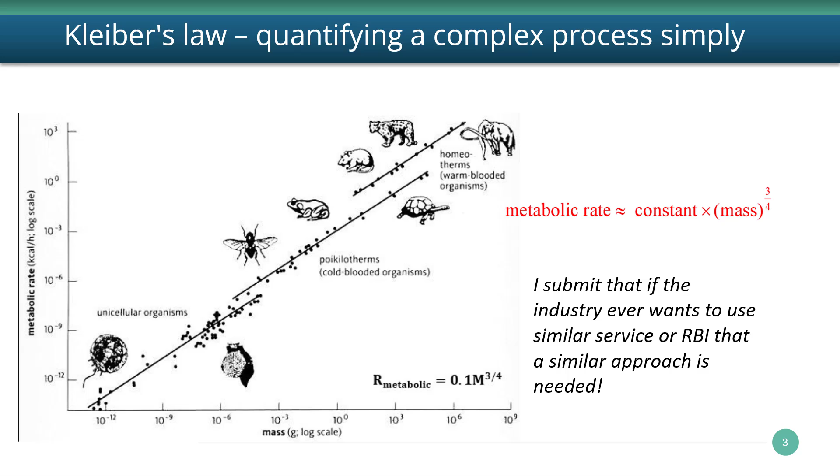Back on topic. Corrosion can be measured at any time for all tank components except for the tank bottom. That is why we are focusing on tank bottom corrosion during this talk. Getting access to the tank bottom requires that the tank be cleaned and gas-freed so that internal entry can be made to assess the state of corrosion as well as the internal condition of the tank. Typical corrosion mitigations are coatings and sloped bottoms.

The window of opportunity for bottom corrosion measurements piggybacks off of the tank internal inspections, which only occur every 10 to 20 years. Unfortunately, no serious public domain work has been done on corrosion rate prediction for tank bottoms. I doubt that any company has done sufficient work in data collection and analysis either. In the data sets I have reviewed for several major integrated oil companies, they all had serious flaws making predictive analytics for corrosion impossible or inaccurate at best.

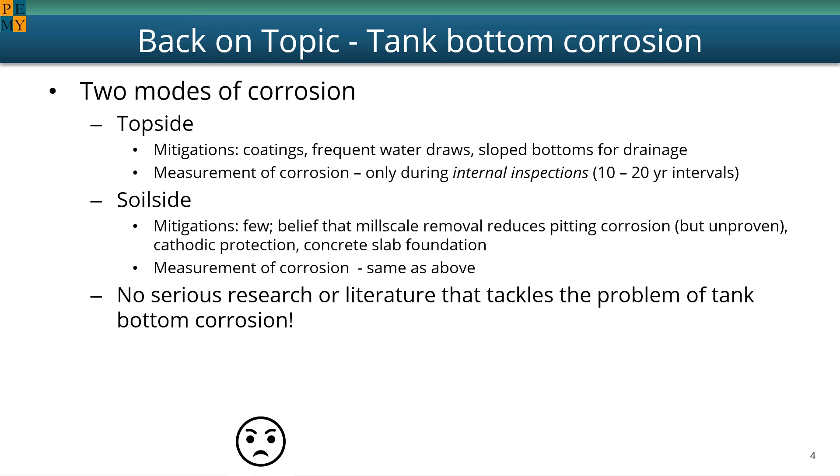Earlier I said that tank bottom corrosion was complex. You will often see or hear a claim that corrosion can be predicted with a table like the one at the top left. Unfortunately, what is not mentioned is that the variables, and there are many of them for tank corrosion, such as those to the right, have interactions.

To explain this, consider the enjoyment of eating a hot dog. Does a condiment increase enjoyment? In the example of the hot dog versus ice cream, the obvious answer is it depends. Enjoyment goes up if chocolate syrup is added to ice cream, but it goes down if added to a hot dog. Whereas enjoyment goes up if mustard is added to a hot dog, but goes down if it is added to ice cream. The effect of these variables for condiments is called variable or factor interaction, and this is the simplest possible case.

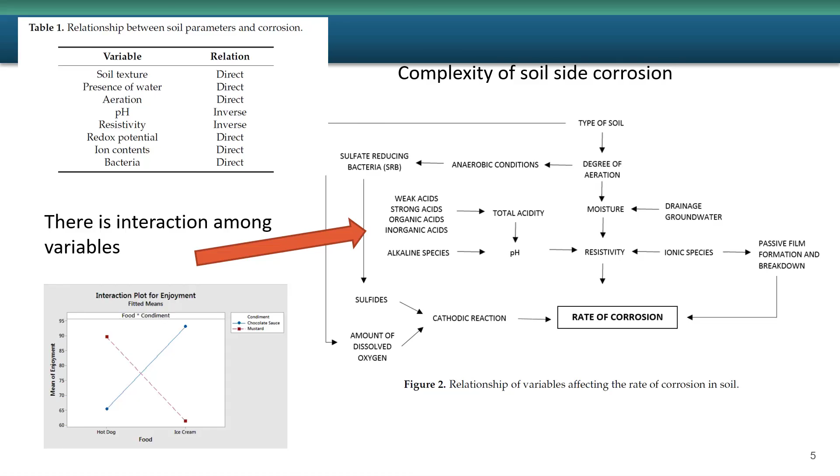Imagine all of the interactions taking place for the variables in the flowchart, where there can be 3-way and even 4-way interactions. No wonder it's nearly impossible to predict tank bottom corrosion. I definitely am not saying throw up your hands and give up. Much more can be done.

What we do know about tank bottom corrosion comes from NIST, where there was and is interest in buried pipelines, power generation, and infrastructure where steel is in contact with the environment. Early on, it was recognized that steel corrosion follows a power law, as shown. The corrosion rate slows down with time because the ionic flow path becomes even more difficult as a result of corrosion products that impede the ion flow. At this point, I remind you of Kleiber's law, and that it too was a power law. Of course, the parameters are different, but a simple power law works for corrosion too.

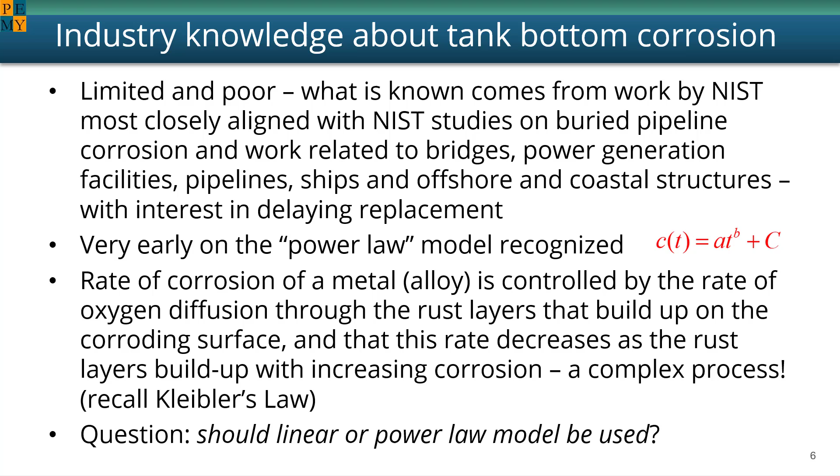However, today, and rightly so, the linear corrosion rate model is used. Even though it is slightly less accurate than the power law, it's much simpler to work with. So let's dive into corrosion modeling now. What does tank bottom corrosion data look like?

Here is data from a major integrated oil company, where the internal or product-side corrosion rate for 33 finished fuel tanks in 5 refineries was investigated. In total, there were 30 gasoline, 8 jet, and 4 other tanks. You can see from the table that 2 were in one refinery, 5 in another, 12 in a third, 10 in a fourth, and 4 in a fifth.

At the lower right, you see a box plot for this data. A box plot shows the interquartile ranges. The heavy line is the median. The lower 25th percentile for this plot is nearly 0, and the 75th percentile is just below 10 mpy.

There was one tank that had a corrosion rate of around 25 mpy. Unfortunately, in this study, they failed to state whether the tanks were coated and how long the tank was in service when the corrosion rate measurements were made.

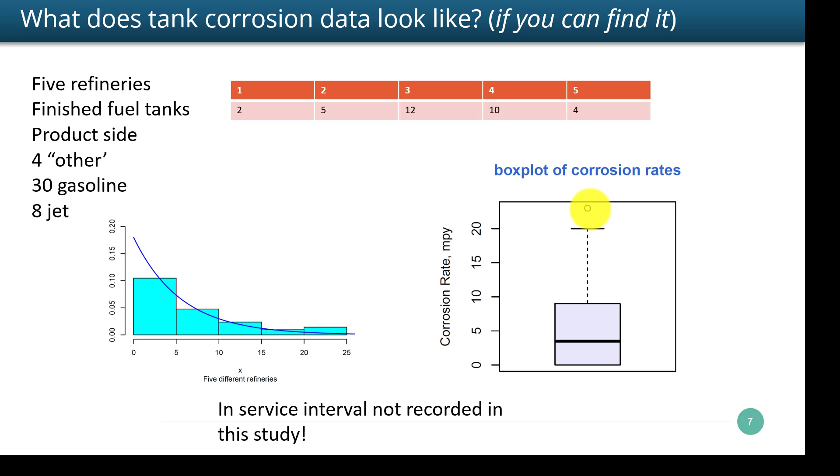Now let's look at soil side corrosion rates for these same tanks. The two plots are just different representations of the same data. Every data point is shown in the left plot, which is called a dot plot. The box plot on the right shows the 25th percentile is now about 5 or 6 mils per year, and the 75th percentile is around 12 mpy. There are also more outliers, and these have higher corrosion rates than the product side.

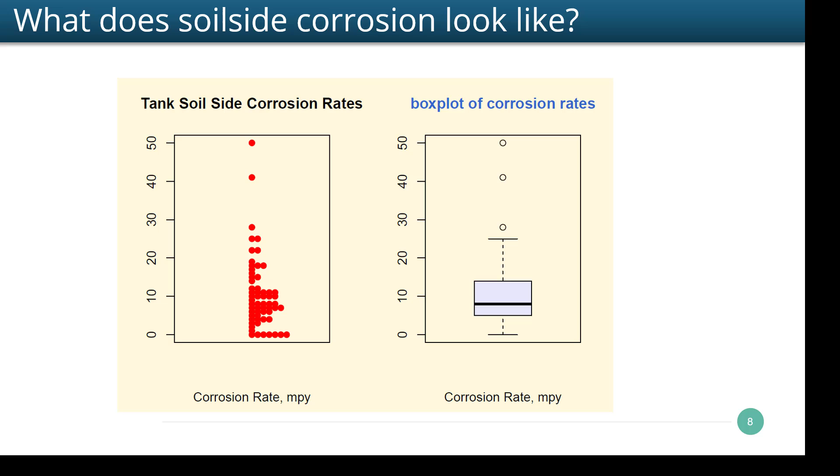For finished fuel tanks in refineries, it is clear that soil side corrosion is more aggressive than product side corrosion. One important aspect of the data was that it came from 5 different sites, and you would expect they differ in terms of corrosion rate.

Although data should never be tossed without a good reason, in this case one of the refineries was on such a muddy soil in a marine environment and with mostly heated tanks that it was thought not to represent typical corrosion rate processes for finished fuel tanks in refineries, and so was thrown out.

The histogram at the right shows that most soil side corrosion is less than 10 mpy, but the long tail also shows that it's possible to have very high corrosion rates occasionally.

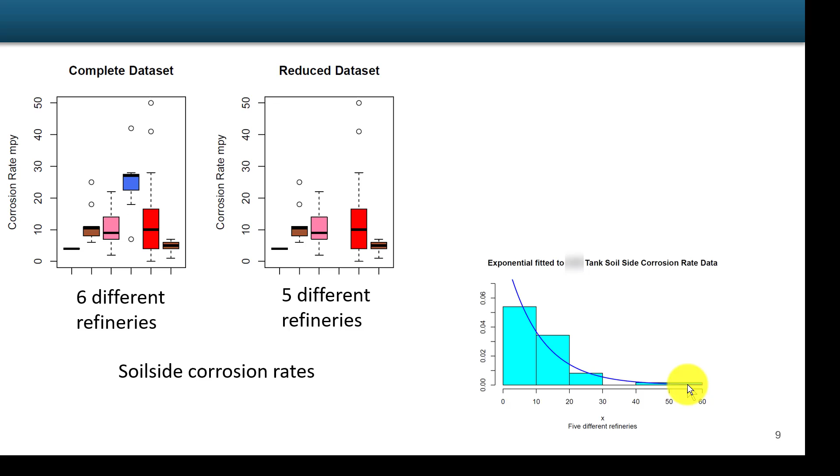I want to mention the El Segundo bottom. This is a double bottom tank that uses a concrete spacer and not a sand spacer, which is why it deserves its own special name.

Concrete is alkaline, and steel is known to have reduced corrosion rates when in contact with the concrete. Based on a study at the El Segundo refinery, the corrosion rates were substantially less than those for a typical single bottom tank. Every tank at this refinery now has an El Segundo bottom, and the corrosion rates are much less than for single bottom tanks.

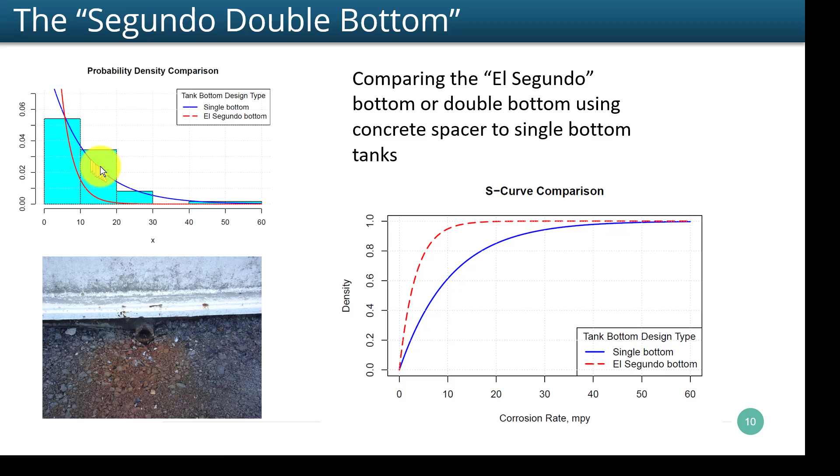The red line in both plots shows the El Segundo tank bottom probability density and distribution. The blue line is for the previously installed single bottom tanks.

In our quest for understanding tank bottom corrosion, we came across systematic studies by NBS, which was formerly the U.S. National Bureau of Standards, and is now NIST, or the National Institute of Standards and Technology. In the old days, it was not known if cross-country pipelines should be insulated, so a long-term study between 1922 and 1939 was conducted for this purpose.

Samples of pipe were buried in 47 sites throughout the U.S. Specimens were recovered, and every 2 years, some of them were dug up to periods as long as 17 years. There were 3 alloys used.

At the time of the study, the practice of statistics was in its infancy compared to what we know how to do today. The study was looked at again using modern knowledge of statistics at the request of DOT. Dr. Ricker published his findings in 2010. I had the privilege of discussing his study in detail with him in 2010.

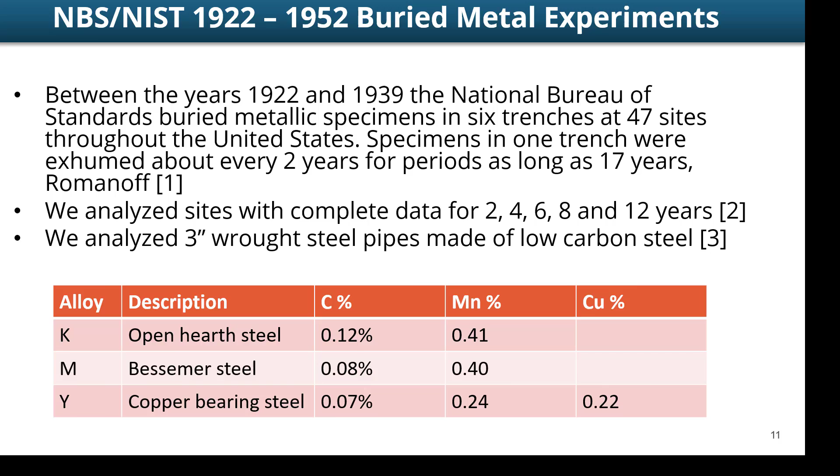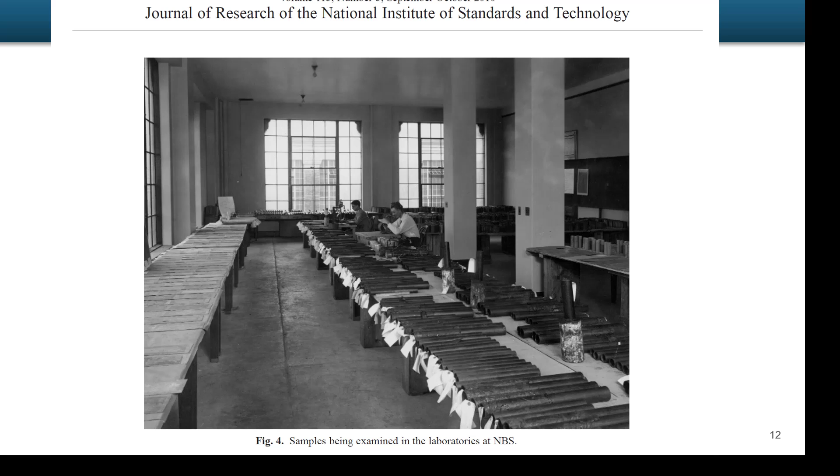Looks like a government operation out of the 40s or 50s, doesn't it? This is where NIST exhumed pipe samples which were tested and analyzed for corrosion. Unfortunately, I doubt a serious study like this for tank corrosion will ever be conducted again.

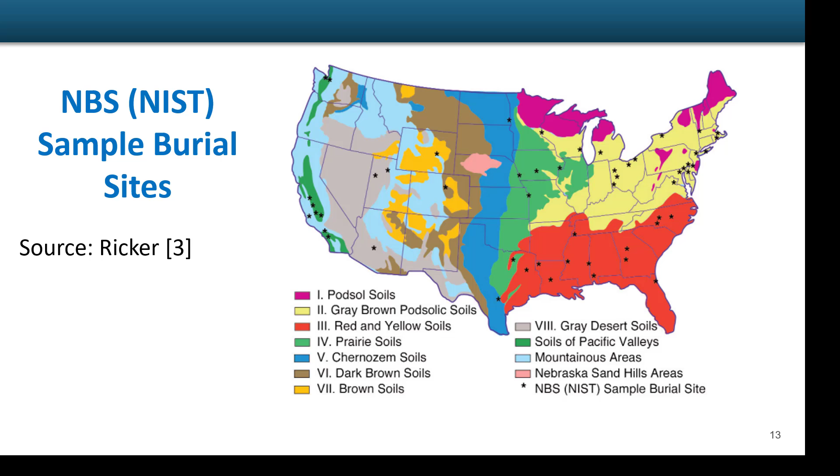Here is a corrosion pit depth versus years in service. Notice how smeared out the corrosion depth is. You can see that the trend is really somewhat nonlinear, because for rates under 4 years of burial, the rate is increasing faster than it is beyond that point.

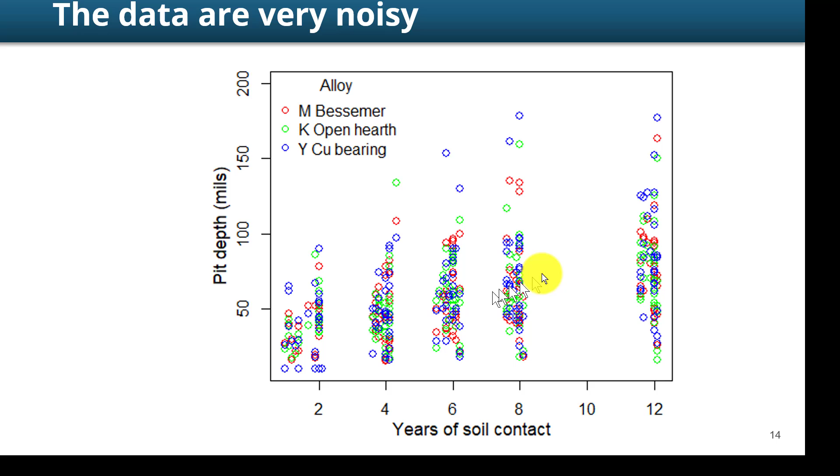These are best fit regression lines. The corrosion depth data have been put on the log scale, which makes the data appear to be linear. In fact, the linear fit to this log data is quite good. You can see that each alloy has its own regression line, meaning that the alloy had an impact on how corrosion was occurring.

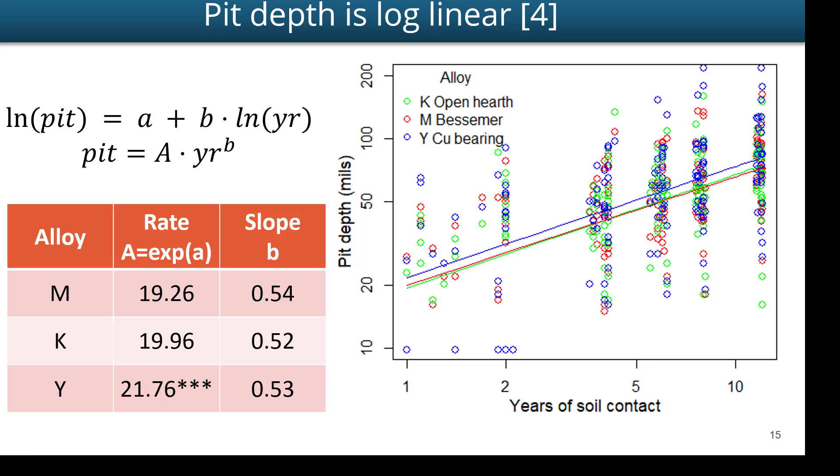This is the same plot showing the pit depth on a linear scale where you can see the power law causing a slowdown in corrosion. The copper steel corroded faster than the other two alloys, which corroded at virtually the same rate.

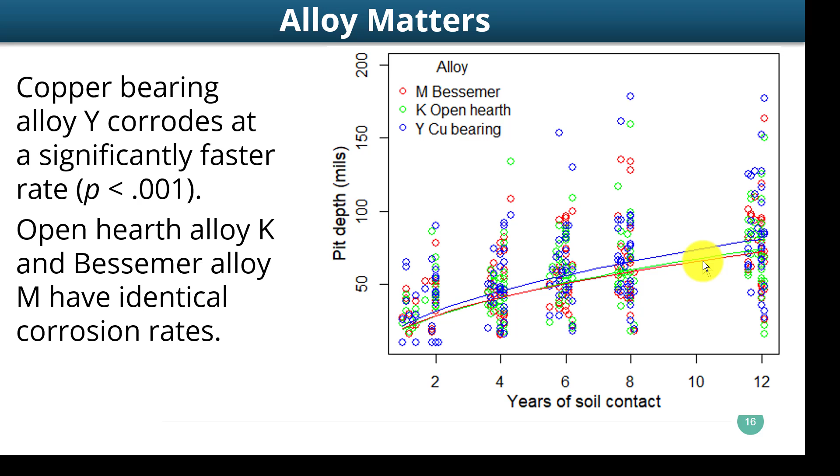But don't take this too seriously, because there is variable interaction with other variables such as the types of ions in the environment or the presence of oxygen, which we showed can have a large effect on how variables behave when they are combined. We studied the data from a large tank facility operator, which we will refer to as Petroleum Storage Facility Operator, or PSFO.

Note that the data are sparse, whereas data for mouse clicks can be collected free by the millions per minute by companies like Facebook. Each data point collected for tanks represents about $1 million in tank cleaning and outage costs, and occurs only once every 10 to 20 years, and yet still gets screwed up because people do not follow a rigorous data collection protocol.

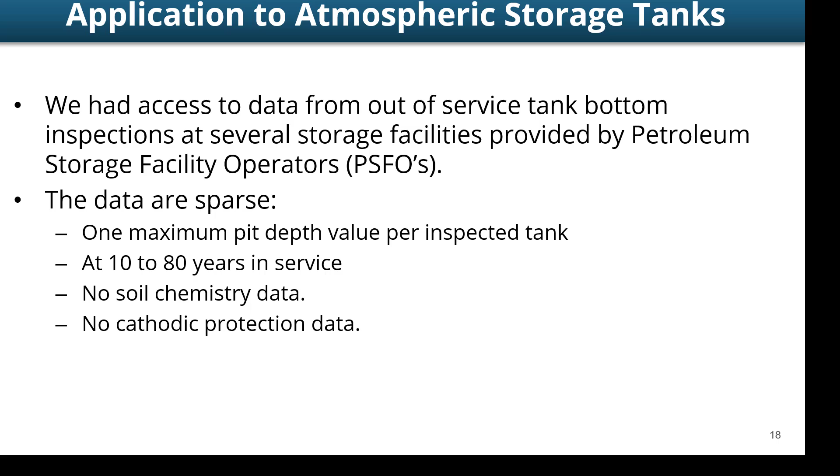The black triangles are where the corrosion penetrated the wall thickness. Similarly, for the PSFO data, the open red squares are the pit depth, and the solid red triangles are where the bottom was penetrated by corrosion.

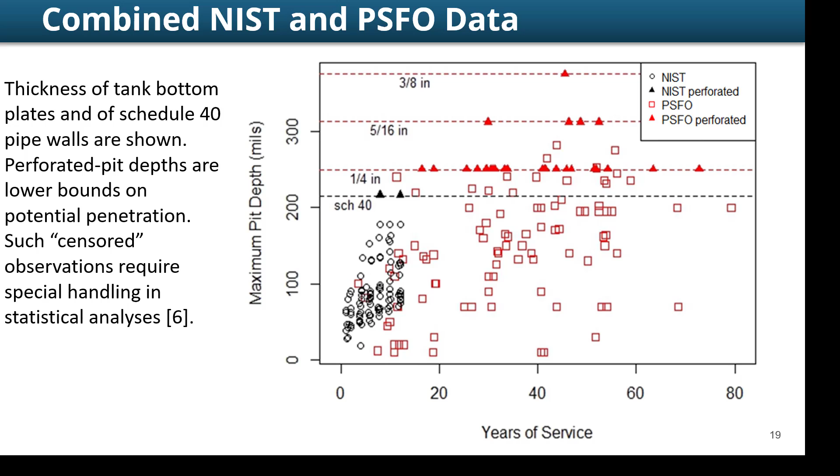Because it is not known when the penetration actually occurred, it has to be treated using different statistical methods. This kind of data is called censored data. We fit a power law to the combined data set. As expected, it is close to the square root of time, where depth equals a constant times time in years to the 0.41 power.

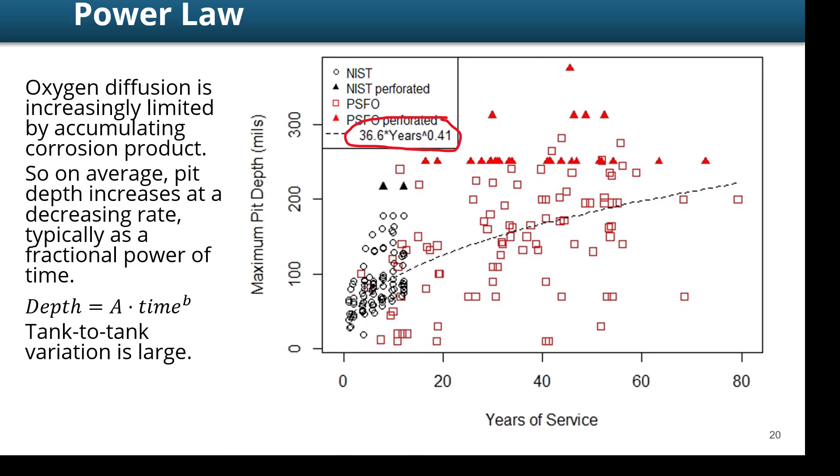Actuaries develop actual human survival probabilities by age for the purpose of insurance, healthcare, and many other purposes. They use cohort data, which is a group of 100,000 people born in a certain year, and then track them until there are no survivors. There's plenty of data for human mortality because it helps insurers stay profitable.

But for tanks, the data is sparse and scant. Therefore, statistical methods must be used to establish probable lifetimes, where life is defined as a period prior to corrosion penetration of the tank bottom. Although we did not invent the idea of the gamma diffusion process for corrosion analysis, we did apply it to the sparse tank data that we had, and I will show you that now.

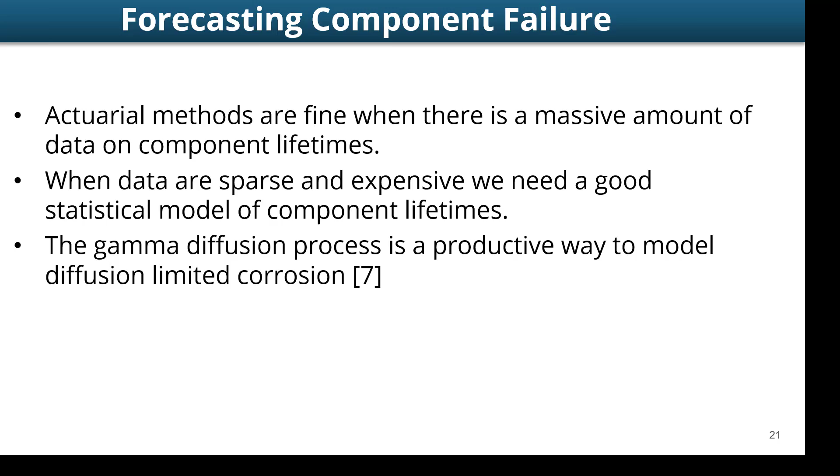We first have to understand a random process, and what better way is there than the so-called drunkard's walk? A man staggers randomly in different directions. While you can have a 1D or 2D or 3D random walk, we'll just focus on a 1D random walk for tank corrosion. Let's say he has an equal probability of stepping to the left or to the right. If he had to walk a highway line, the plot shows how he would tend to wander to and away from the line.

Because the probability of moving to the left or right is equal, the long-term average of all steps is 0. It's on the line. But let's change the process a little to mimic corrosion depth. Let the drunkard only be able to take forward steps, or positive steps. Corrosion only increases, it never decreases, hence the step is always positive.

Let's say the distance a drunkard steps forward is governed by the gamma probability distribution. I'll show you what that density looks like in a second. Finally, the probability of distance of each step forward is unchanging with time. Putting this all together, we get the next slide.

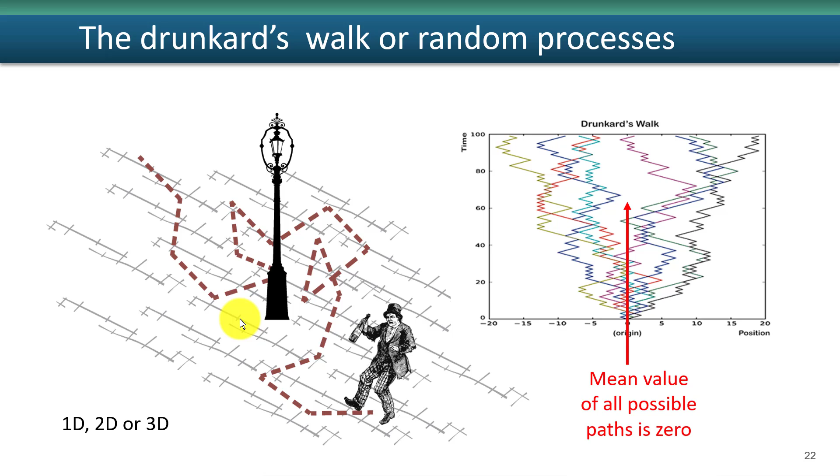Unlike the first scenario where the drunkard walk had a mean value of 0, the mean value is shown by the red line. Corrosion is ever increasing, and the red line shows the average value, which follows the power law, but we treat each time increment as a random step, where each step has a gamma probability density shown by the humped curve.

Notice that it's not a symmetric curve. The gamma probability density is non-negative, so no steps reverse direction. Just like corrosion, the direction of corrosion is always positive. The gamma density just shows the likelihood of the jump size in corrosion depth at the next time increment.

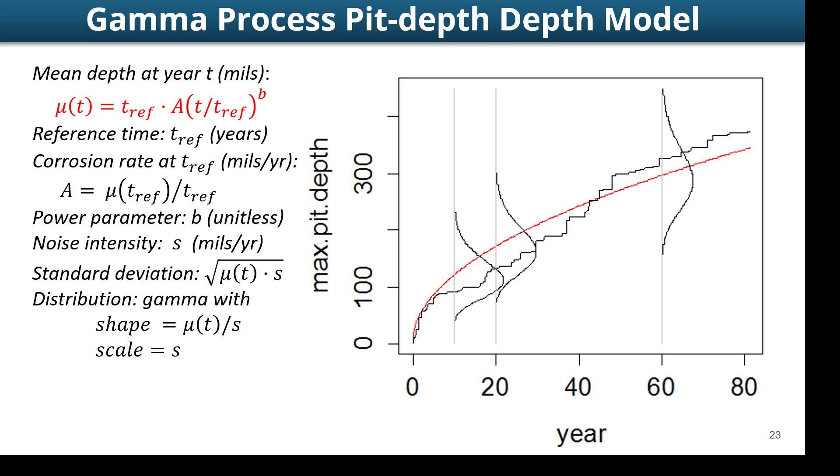Part of the analysis is to figure out the most likely parameters for the gamma density, which are called the shape and scale parameters. I won't get into that now, as I'd probably put you to sleep. This is just another way to look at the jumps in corrosion using the gamma process model. The total corrosion growth is just the sum of the independent increments.

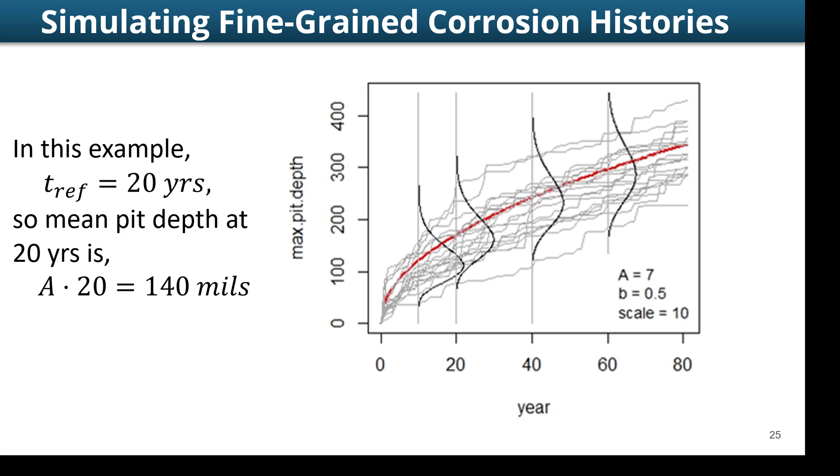Because we are dealing with a stochastic or random process, if we were able to start the clock from zero over and over as many times as we like, we would get a series of lines representing what I will call corrosion histories. Each gray line represents a possible corrosion history, so you can see that some will result in larger corrosion growth than others. This is the essence of a random process.

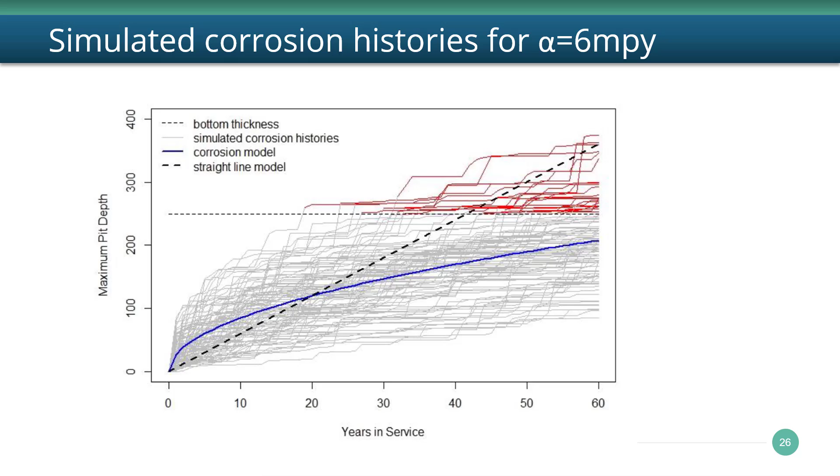The cool thing is that we can count the number of corrosion histories which penetrate the 250 mil thickness dotted line, which is the number of corrosion histories that have caused penetration failure. When this is divided by the total number of corrosion histories, we get the probability that the corrosion will fail the bottom as a function of time in years.

By design, the internal inspection intervals prescribed by API 653 are necessarily going to be conservative, but the standard allows savvy operators to use probabilistic methods to set internal inspection.

As an alternative to the table is a survival curve shown here. If we want to set our acceptable survival probability to 90%, we can just follow the red line from 0.9 to the time axis, and we get the P90 of 38 years. So it takes 38 years before the failure probability has reached 10%, and the survival probability will decrease below 90%.

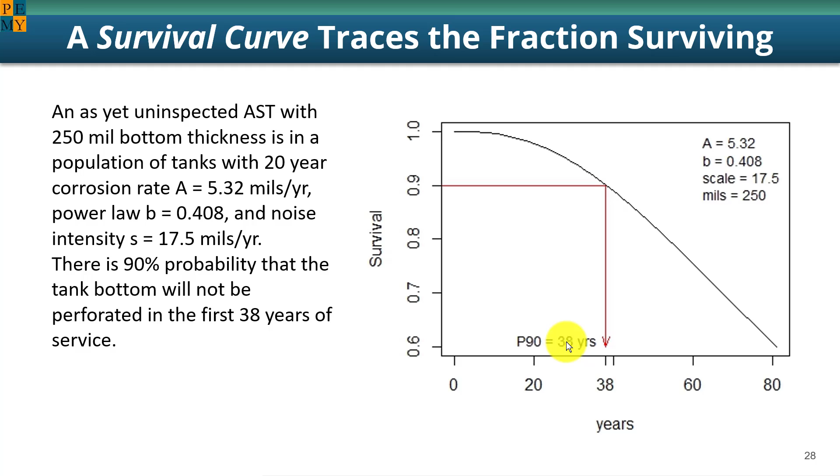I wanted to show you what a corrosion modeling app might look like. Basic data for the control and candidate tanks are input, and the output is a survival function, output for the 85th, 90th, and 95th percentiles, listing when the tank should be taken out to meet the survival criteria that are specified. Note that I recommend that a survival criteria for operating the tank be no lower than 90%, but that's

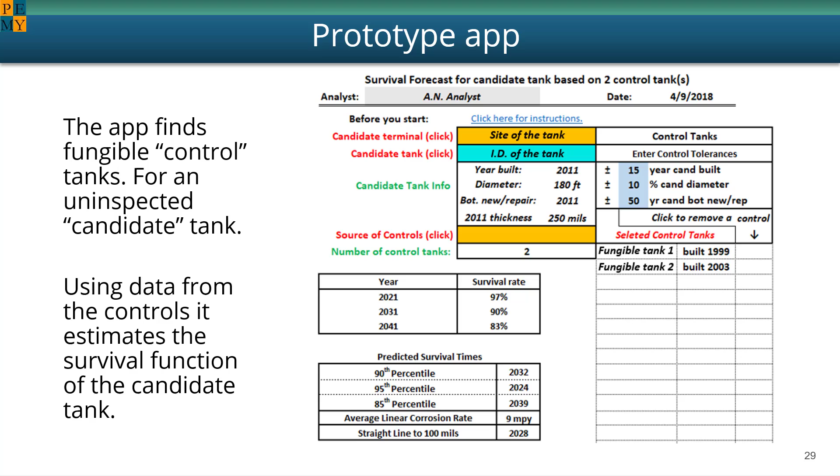I have outlined some of the standard methods of estimating corrosion from data, but until we get data in a proper form, RBI and similar service will not be able to work properly. This is one of the reasons so many companies struggle with RBI as well. This is in addition to a proliferation of black box methods that are questionable. It is no wonder that not only do regulators, but industry itself does not trust these methods fully.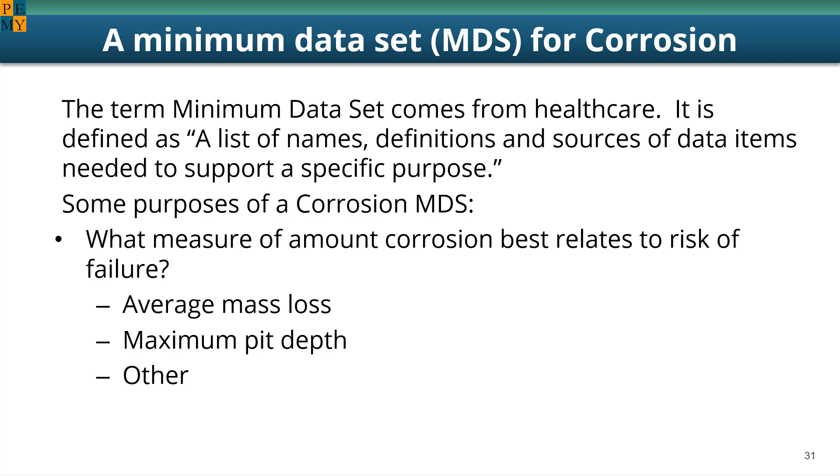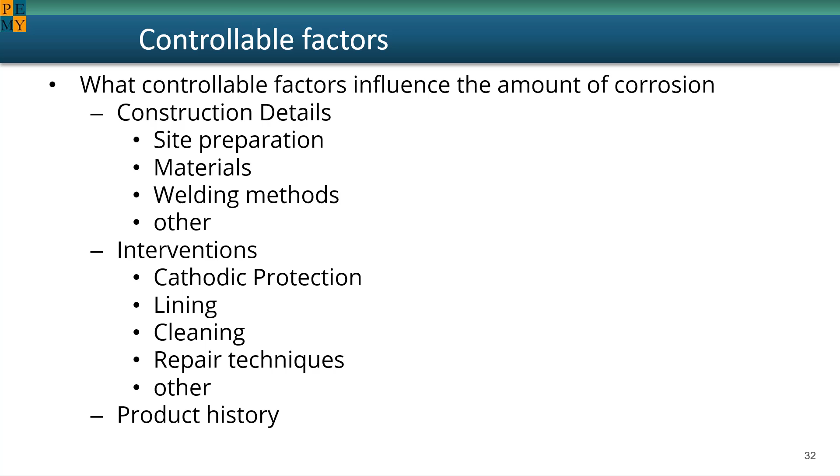We've talked about corrosion mitigation factors, so I won't belabor this other than to say many of these factors must be systematically tracked in order to use corrosion data to predict corrosion. Other factors that influence tank corrosion are listed here, and they as well should be tracked in a corrosion rate database. There are many other issues related to how corrosion is actually measured, and we won't go into these now

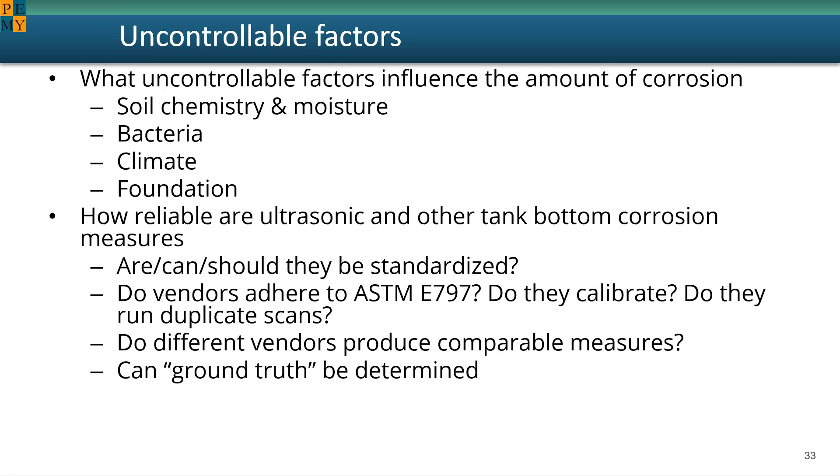as they have been covered by other speakers. The top-level message of this talk is that if the tank industry ever wants to move into the age of data and AI, it will have to conduct studies that are properly formulated, collecting the right kinds of data, and using sound data analytic methods so that we can optimize the internal inspection frequency.

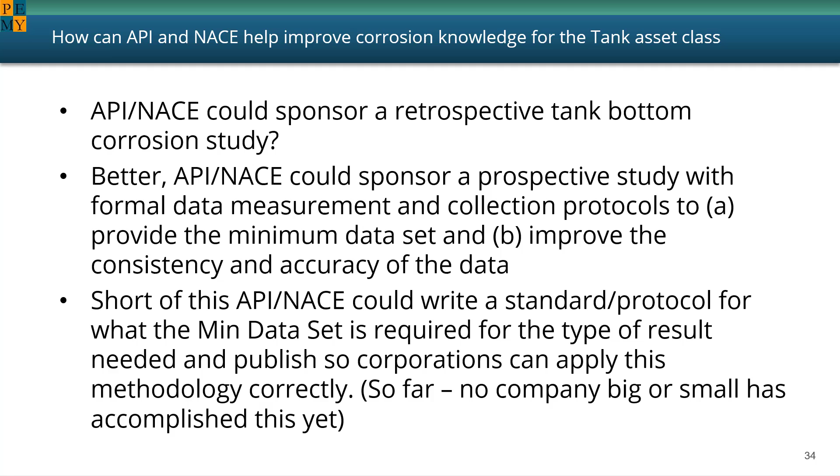This is not just about costs. Unnecessary and too frequent tank openings cause significant liquid and gas emissions. Not inspecting tanks frequently enough has the potential for tank bottom leaks. The only way to optimize this is to have the data, understand it, and analyze it so it can tell us how to set the tank inspection intervals.

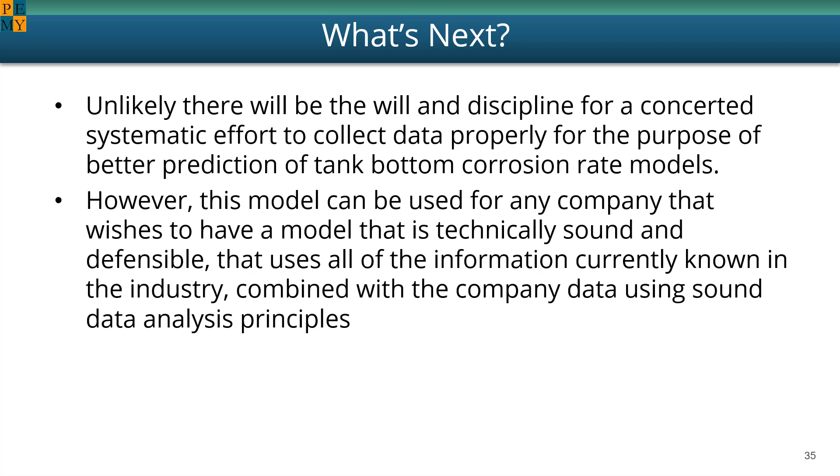I don't have much hope that API or NACE has the will to get the minimum data set so that the tank internal inspection intervals can be optimized. This is because the effort is a long-term effort that takes a committee of experts in tanks, corrosion, and data analysis to set up the protocols for the data collection and persist for years in collecting the data so that we do have a minimum data set. I hope there are those of you out there who can make it happen in spite of the challenges.